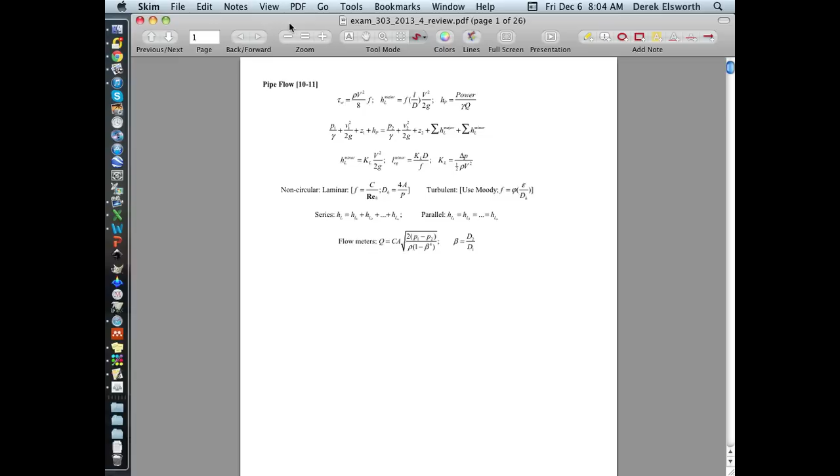That might be the last thing on your minds right now. You realize you have to get across the final hurdle. As I say, it's been a pretty broad waterfront. In the light of a number of years working, you might decide whether this class is useful to you or not. But certainly, it's a fundamental class in terms of the activities that you'll ultimately use in your own disciplines when you graduate from here.

But that might be the last thing on your mind right now. So getting ready just to get the hell out of this class basically might be something that's more in line with your thoughts. So the final is on the first Monday. It's an evening final. It's just 10 minutes short of 2 hours, so it's an hour and 50 minutes. It'll be the same scoring as before, 330 points, full score is 300.

There are 3 questions. Instead of making it comprehensive as we have done in the past, so if you look at the prior exams, you'll see that some of them have pressure on surfaces questions, this one will limit itself to the last 3 topics. So the last 3 topics are pipe flow networks, external flows and forces on structures, and channel flows. So those are the 3 topics that the last one will be.

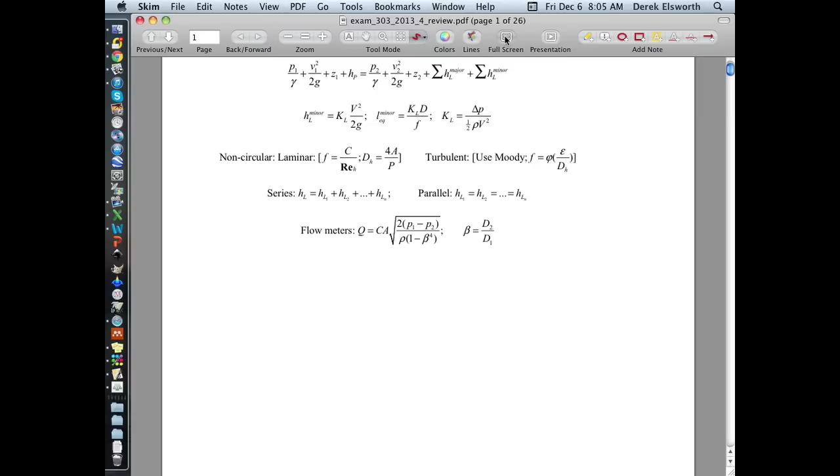But also, we made the point before that the one question that didn't turn up on the 3rd midterm actually will be on this. So out of the 3rd midterm questions, there were potentially questions on pipe flows, energy equation, and streamlines, right? And so you guys would know what didn't turn up on the main midterm, not the retake exam or the conflict exam. Only talking about the midterm. So I've tried to steer you in the right direction before.

So pipe networks, external flows, and open channel flows are fair game on this. Plus the run over from the other one. Of course, you can look at the materials that were talked about in the 3rd review session to get some feel for that. Because basically what happened was I wrote a question on the 3rd midterm, which made the exam too long, so I just pulled it out. And so you can probably guess exactly what that would be from looking at that. So at least you're ahead of the game in that.

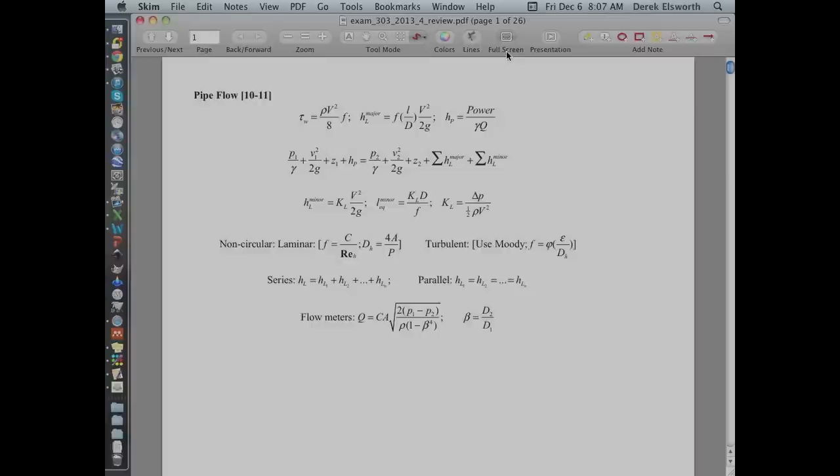I'm doing all the talking. Anyone have questions for me before I start going on? So I'll just review the stuff from the last 3 materials that we have, and certainly if you look at what's happened in the past, the materials that we went through in review basically encompass all the material that you'd need. You need to understand how to use it, and to use it somewhat creatively maybe, but that's basically the deal. Okay. So that's what we'll do. I'm not going to worry about that.

So pipe flows. Well, we know about pipe flows. You'll never have to draw or bring a Moody chart, but you certainly know what they are now. In terms of the big picture, we've seen the same kinds of behavior for pipe flow, which is an internal flow, and external flows. It's the same idea, right? At very high Reynolds numbers, the magnitude of this friction factor, which is a coefficient of drag, is constant, and it changes as a function of velocity at low ones, because this is viscous drag and this is pressure drag in the system, and so you know that. And so we've seen the features of that before.

I put that on only because when you're dealing with pipe flow networks, you need to know a little bit about pipe flows, and this is basically the expression that you know how to use. You used it on the last exam. What are the features of this? Well, the pump head is positive if you're putting energy into the system to pump. It's negative if you're generating electricity. The magnitude of this pump head is what? It's probably written on here. It is the power divided by the mass flow rate, Q rho g, I think, right? So this is the mass flow rate times g. Pretty sure that's right. Head losses are always positive.

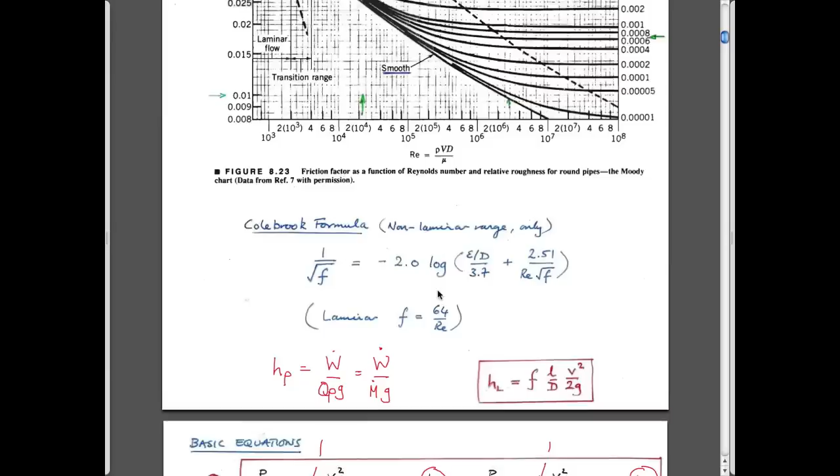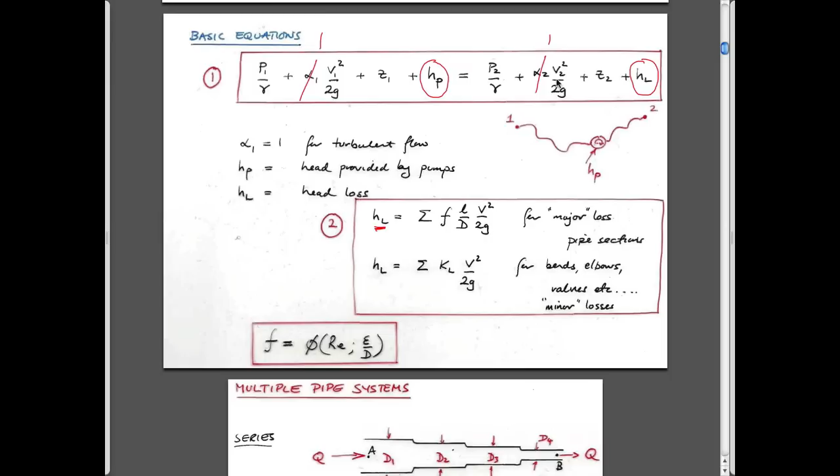Irrespective of which way you're moving, you're always losing. And the pressures, velocities, we always put this 1, we don't care about that. Elevations, so we know everything about these heads. These are at a point, and you write these at a point, and then you have to include the influence of losses in the system. Losses come in 2 flavors, so-called major losses, which are small incrementally, but over a long length of pipe they add up. Sum friction factor, given by this. Constant if it's turbulent, not a function of velocity. Length of pipe, diameter of pipe, velocity in the pipe, and so-called minor losses, which you sum up, which are velocities in the fittings, per se. So these are the local velocities in the pipe or the fittings. These are the velocities at the endpoints, and so you well know how to do that.

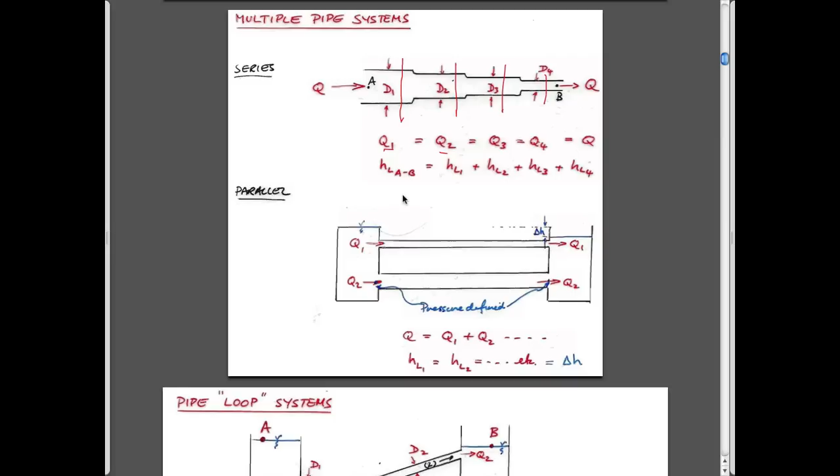If you use those pipe flow equations for systems, systems come in two different flavors: either in series or in parallel, and they have different attributes. If they're in series, that's by continuity. If you take a section anywhere across the pipe, the volumetric flow rates have to be equivalent to each other. If you know the flow rates through the system, you know the velocities, and therefore the head losses, and you can sum those up to move from A to B, because the sum of the head losses has to add up to the total head loss across the system. So those are the attributes of a series system.

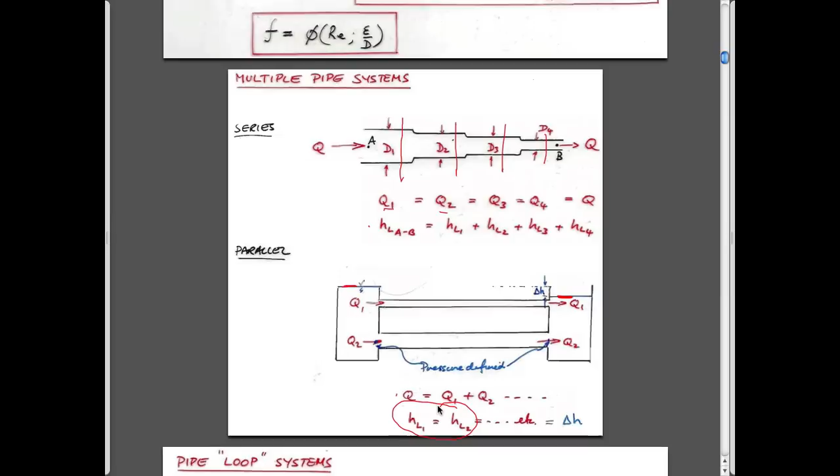If you have it in parallel, the opposite behavior is true: the flow rates have to sum. You have a flow in here, and a flow in here. Because it starts off at this particular head and ends up at this particular head in both cases, the head losses in both pipe systems have to be the same. If you had a third or fourth pipe, that would have to be the same as well. So those are the rules for dealing with pipes.

If we deal with loop systems, the behavior is such that you can write Bernoulli between upstream and downstream and take two different paths. In this particular case, we did one like this in class. What you can do is write Bernoulli between the upstream and downstream. You make it easy for yourself by doing it between cases where you can get rid of the most variables.

So if it's a big tank and you can write it on the surface of the big tank, you know the pressure here is atmospheric. You know the big tank assumption would be this, so you've immediately got rid of two of your terms. And if you're working with the z magnitudes at each of these cases, you know the difference in the elevations. So the solution is to write the expression through one route and then through a second route.

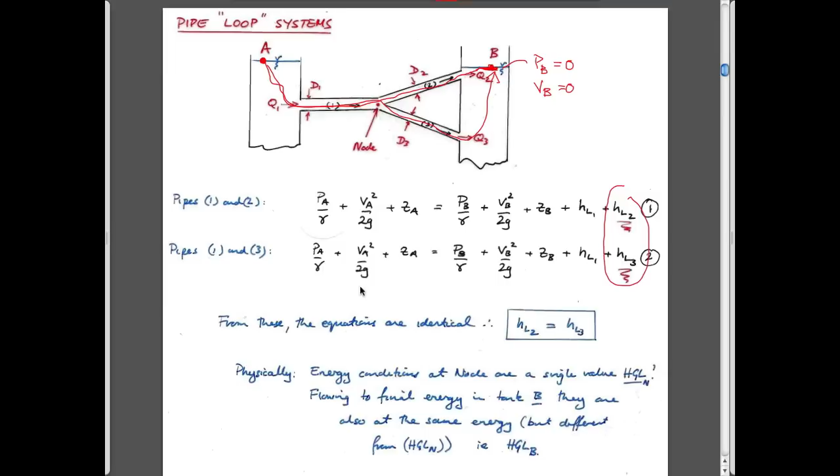And that's what these two expressions are. Since they both end up at the same place, and every other term within here is the same, these magnitudes have to be equal to each other. So those three requirements are the ones you might have to have a handle on—nothing more than that.

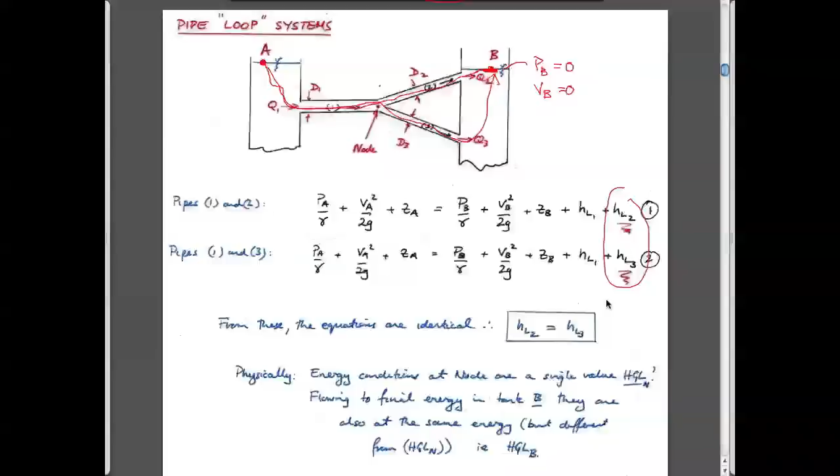We won't do the ones with three different reservoirs where you have to solve a cubic. We said in class that you wouldn't have to do that, and you won't. We went through this one in class—I won't go through it again. You can probably decide from that what to focus on, maybe based on what we talked about for a long time in class.

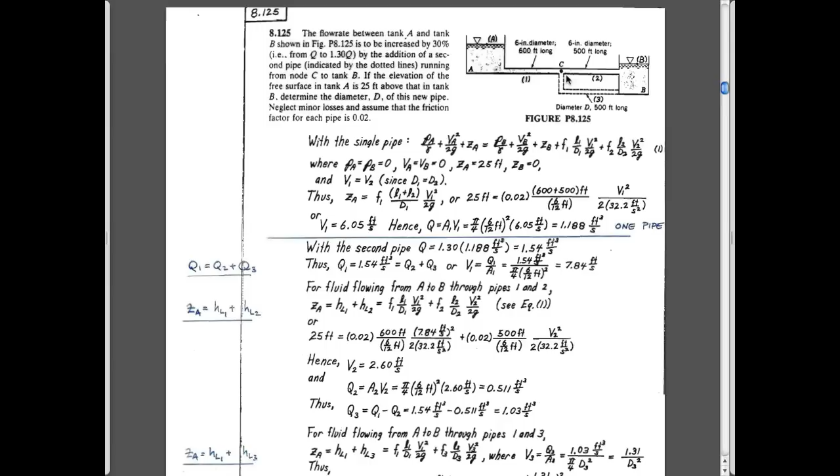This is a question saying if you want to increase the flow rate by 30%, how big a pipe do you have to add into the system? We went through that, but I'm not going to go through it again. You can decide based on that what you want to focus on. You'll realize there are subtle messages in here, not least of which was that we also looked at a video coming in here—so that might have something to do with what we're doing as well.

External flows: you can integrate external flows around buildings and around features. I won't ask you to do that in the exam. I'm not sure if there were any homework questions that did that—maybe there was one, I'm not sure—but we won't ask you to do that. We will ask you to know how to use these formulae for lift and drag.

Lift and drag, in a nutshell: lift is the force that's perpendicular to the flow, and drag is the force that's parallel to the flow, just by definition. These are lift forces and drag forces as a function of a non-dimensional parameter.

This is basically lift over area—if we take these terms here, over a half rho u squared. This is an Euler number, right? This is a lift pressure—lift divided by an area is a lift pressure.

So this is basically an Euler number, which is an important number for us to understand. The lift coefficient is really just a non-dimensional parameter, you could think of it as kind of an Euler number. And this force is relative to an area.

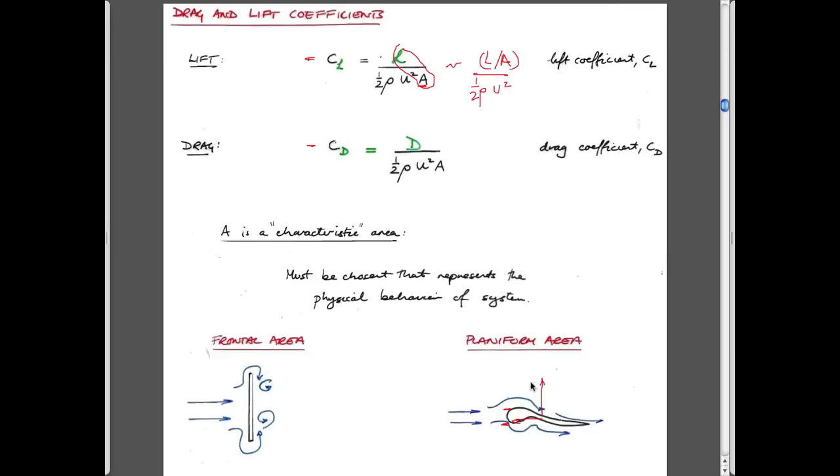It depends on what you're looking at as to what that area might be. For instance, if you're looking at drag on this wing, the area might be the frontal area for drag, but the planiform area for lift. You'd always be told that if that's the case, so you need to be mindful of that.

Also related to this behavior is this division of behaviors into three regions: you have laminar, you have transition, and you have turbulent. Those exist for external flows as well, right? It's exactly the same behavior. It doesn't matter if you're flowing on the outside of a pipe or the inside of a pipe.

The idea is that if you're looking at very high flow velocities, then typically the friction factor is constant. This is equivalent to the coefficient of drag, basically. And also when we look at free channel flows, this is also kind of like the Manning coefficient. So there's some theme in these behaviors, whether you're looking at flow in a pipe with friction forces on the side, flow around an object with friction forces or pressure forces on the side, or a channel where you also have friction forces and loss of velocity as the mechanisms.

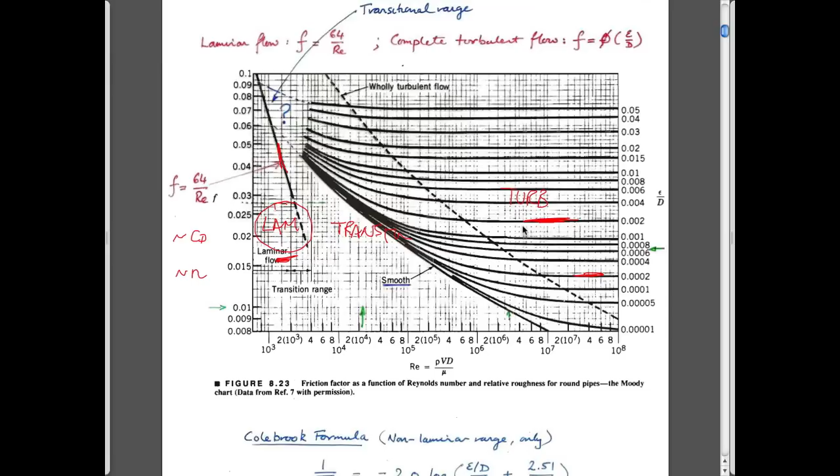The point I was going to make is that when you're looking at drag in the laminar region, this is due to viscosity. It's viscous drag due to the fact that the molecules of air, or typically the molecules of water, want to adhere to the structure they're going around, and they have a physical drag that pulls it across. If you're looking at these higher regimes, this is because you're killing velocity, and the drag force you have is because the velocity away from your plate is high, while at the front face of your plate it stagnates, so there's no velocity at all.

So as you go from left to right in that plot, you're looking at the different behaviors you'd expect to see. Almost all the drag force here would be due to velocity drag, because you're destroying the velocity. If you look at a plate aligned slightly differently, where flow occurs like this, you could imagine that as the velocity changes as you go away from this, you get some drag force applied here. So you get different effects at different magnitudes.

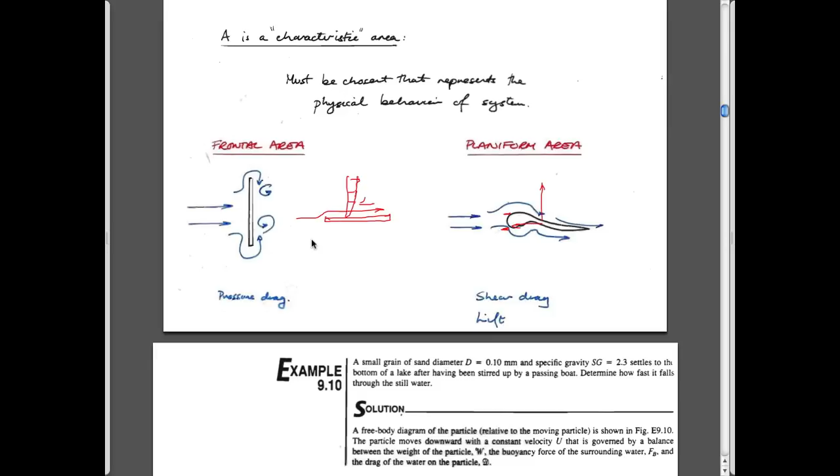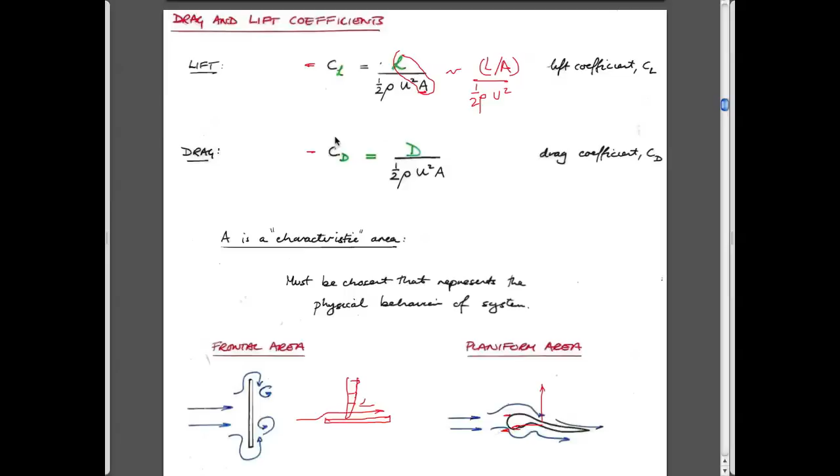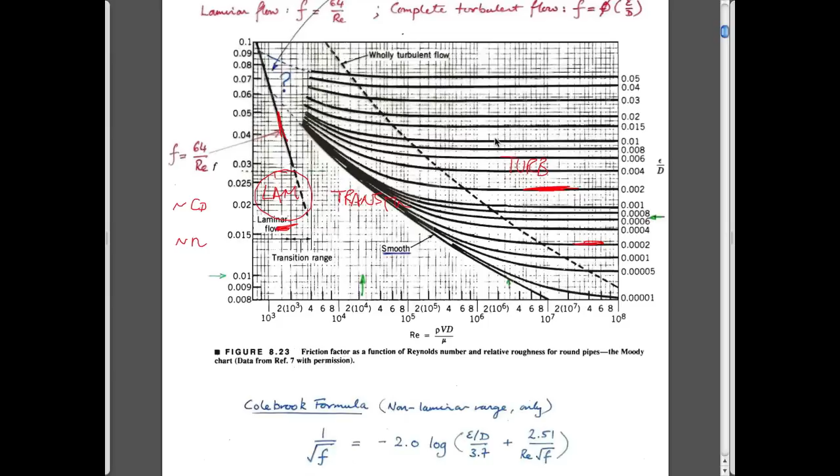Typically, both of those behaviors are encompassed in this drag coefficient. But if the drag coefficient is just a single value, it typically means the assumption is, which is often correct, that the flow velocity, or the Reynolds number, is so high that you're on the right-hand side of the chart. So as you increase the Reynolds number, the magnitude of this drag coefficient doesn't change, which means that most of the drag or the lift is due to changes in pressure.

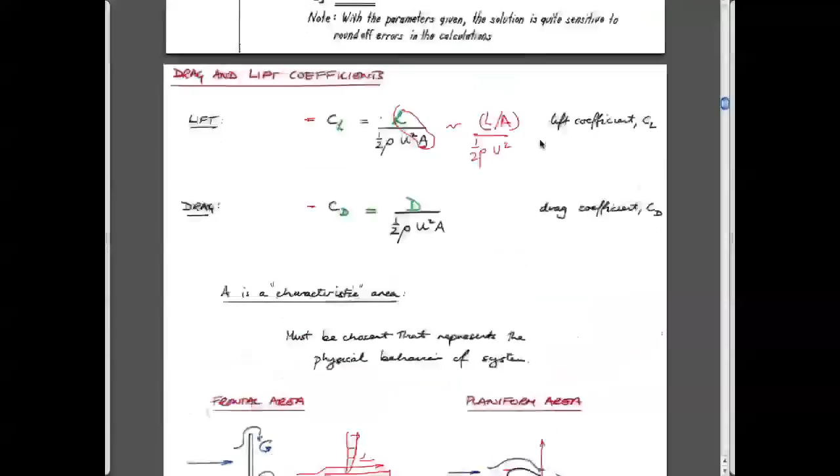So typically that's the case for gases. You need to know lift and drag coefficients. They're basically Euler numbers, and the area we're talking about depends on a frontal area or a planiform area, but you would know that. Obviously the density is the density of the fluid flowing around it, not the density of the object, as you know, stating the obvious. And we went through two examples.

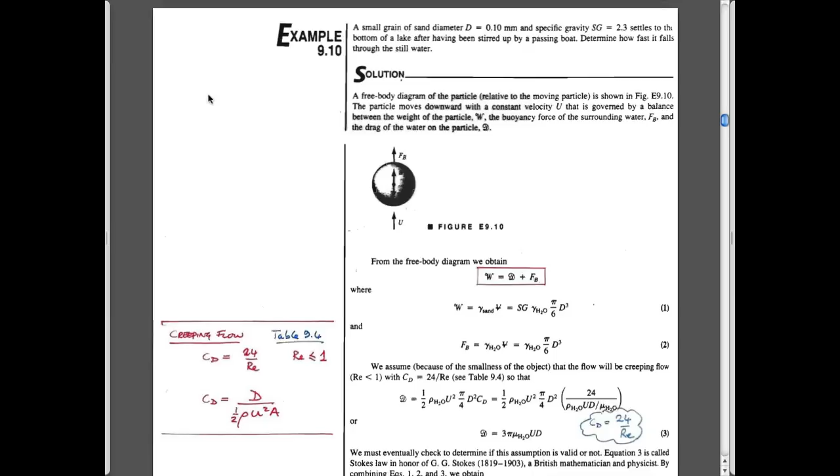The two examples actually deal with the two flavors of these behaviors. If you look at the Moody chart, I know it isn't appropriate for drag directly, well it is for internal drag inside pipes, we have these behaviors: laminar and turbulent. And the solutions you use to solve for these are different, and these two solutions here embody both of these cases.

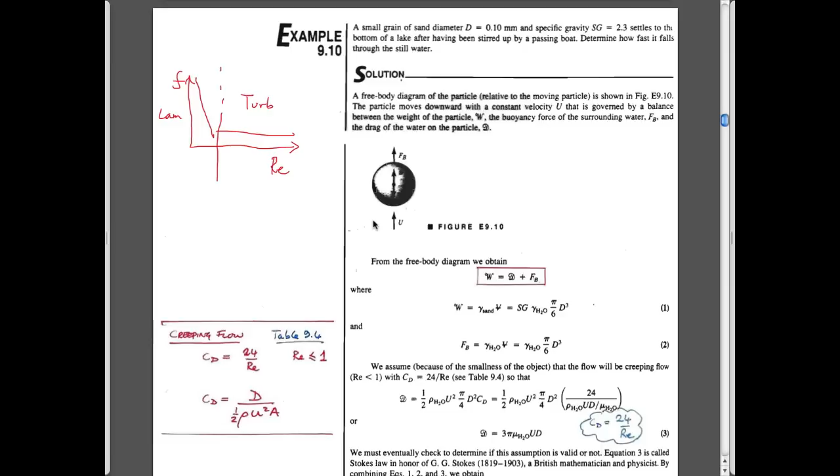This one is a solution for a ball falling through liquid. Sounds like an esoteric problem, but it's one of the ways in which you get grain size distributions of very fine minerals by dropping them into water and measuring the settling velocity, and from that settling velocity calculating the size fraction of the particles.

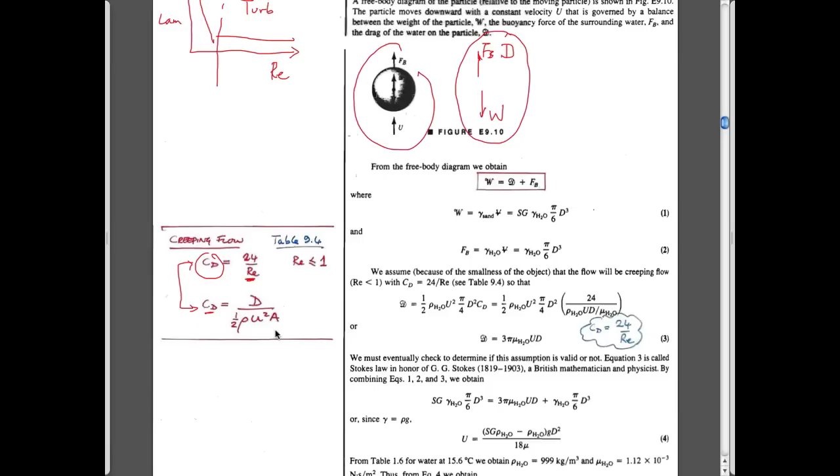In this particular case, the two important expressions are to do a free body diagram, weight of the particle, buoyant force, and drag force, and reconcile those with two parameters. One is the fact that the coefficient of drag is a function of the velocity, which you'd like to solve for, and also the drag force is related to coefficient of drag through this. So you can relate these two, and solve ultimately for the velocity, and you can look through how to do that. So that's for one region of these behaviors, in this zone here for laminar flow.

The reason the solution works out that way is because the drag coefficient is a function of the Reynolds number, which is a function of velocity. This makes it more complicated because velocity occurs in both terms, and you have to work it out. If you look at the case where you have turbulent drag or pressure drag occurring, this is viscous, and this is pressure.

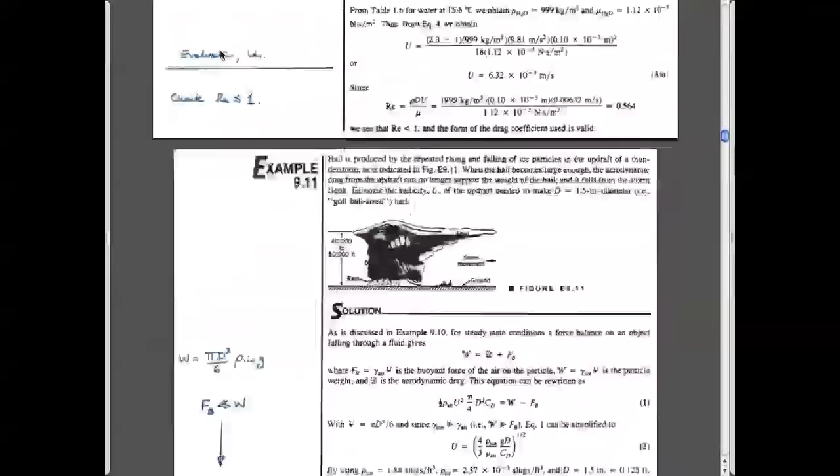The epitome of that is the hailstone example, and it's exactly the same kind of solution. You have a hailstone being lofted up inside a cloud. There's a buoyant force acting, there's a drag force acting, and there's a weight of the hailstone. The drag force is a function of the velocity through this coefficient.

We only use a half just out of convention because it's in Bernoulli. This is v squared a. Now this is a bit more simple to solve, one, because the buoyant force is inconsequential since it's ice displacing air, so the density of air is inconsequential and you can get rid of this. You can relate the drag force to this, and you can solve somewhat more simply than the other case.

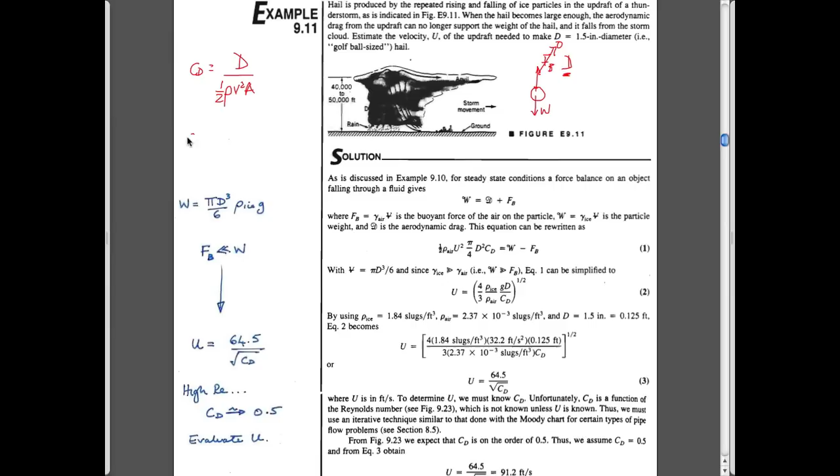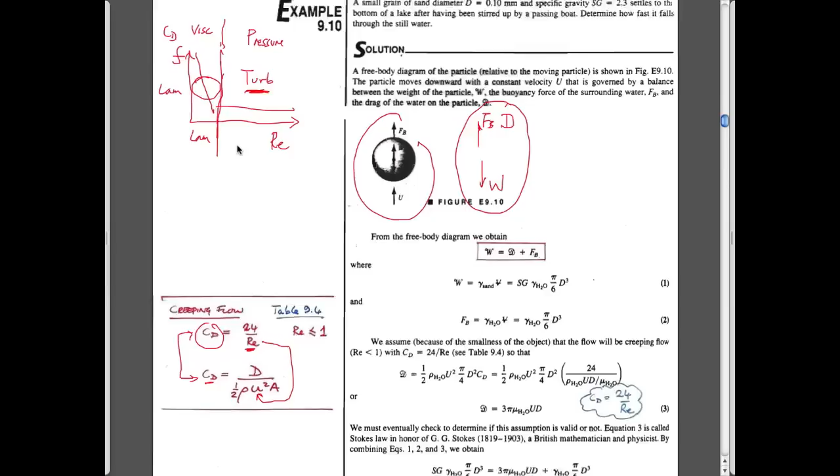Because you don't have the drag coefficient being a function of velocity, the coefficient of drag is constant. Understanding how all this fits together for these two examples is probably worthwhile figuring out for obvious reasons. So that's an important component of what we've done.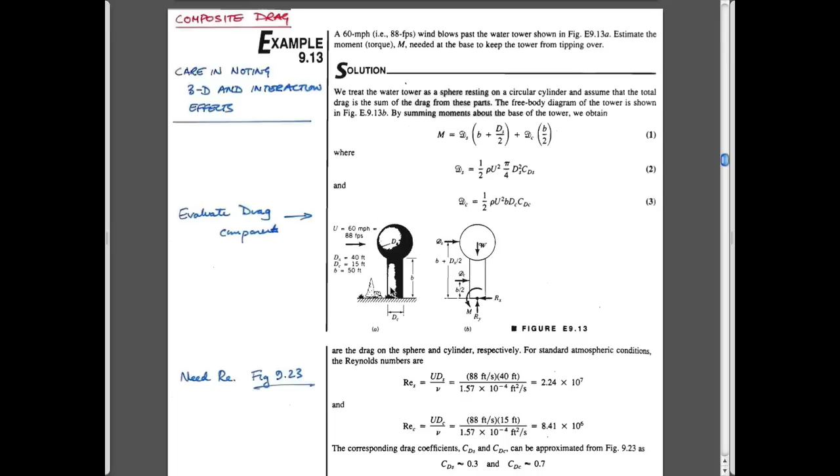We talked about composite drag. It's really just the same as any of the other cases, you're adding up the individual contributions due to multiple bodies. If you have a whole bunch of bodies, they have a certain drag associated with them. The basic assumption is that if you have a sphere on top of a cylinder to represent a water tower, the flow field from the sphere doesn't influence the flow field around the cylinder. Of course it does, but within engineering calculations it probably doesn't affect it that much. That's the assumption used, just to be able to sum up the individual components. We didn't spend much time on that.

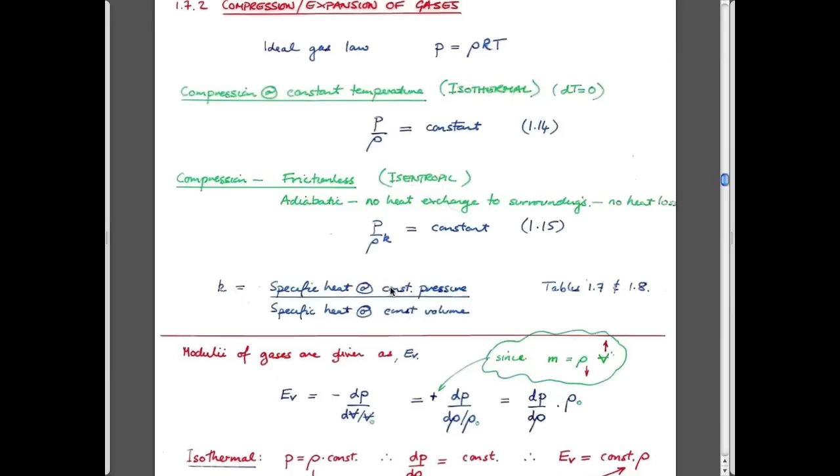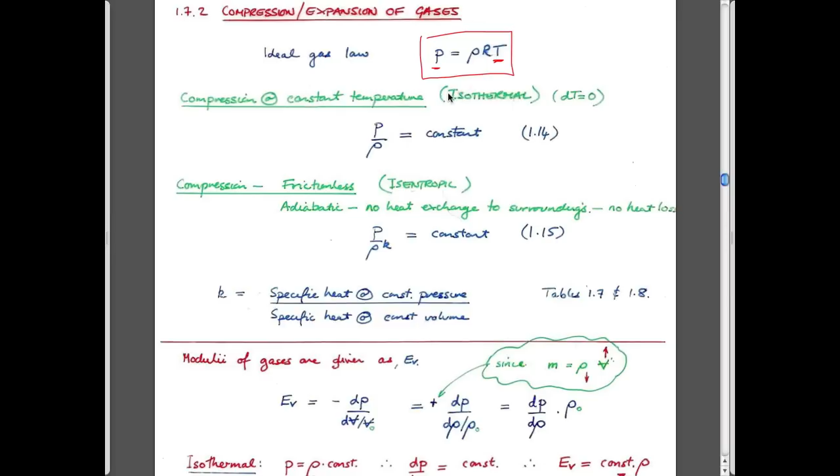This comes from very early on, so don't forget the ideal gas law. Don't forget that this is absolute temperature, and that this is absolute pressure, and that the density comes from this. Remember the ideal gas law.

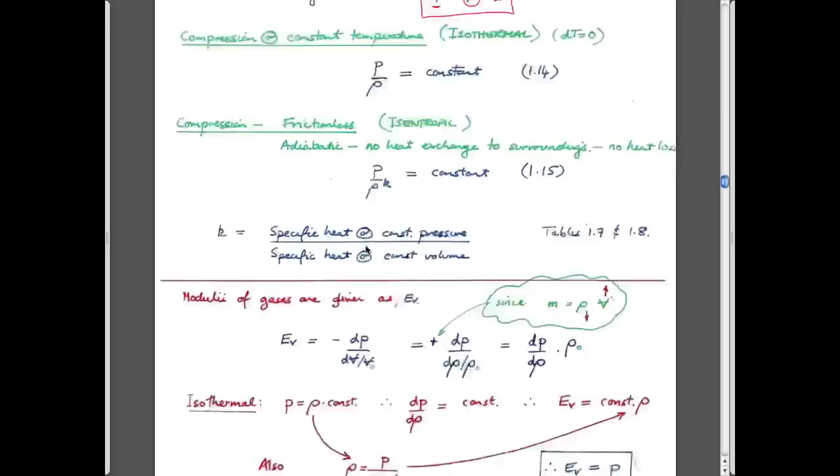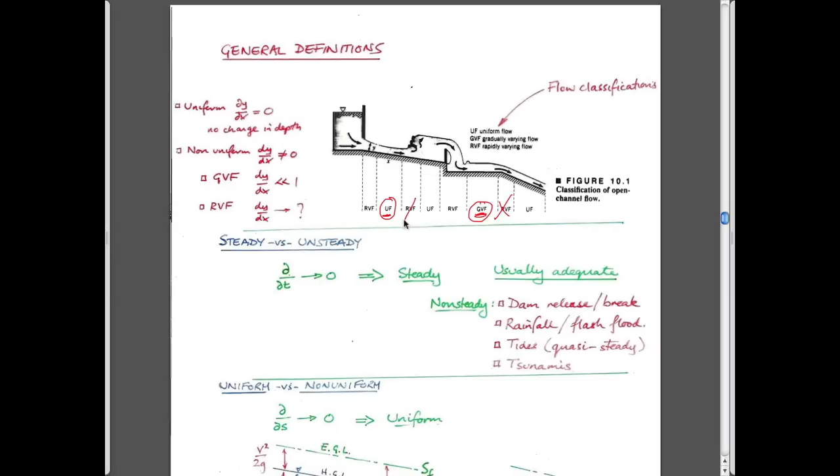So pipe flow networks, external flows, open channel flows - we dealt with two behaviors and classified them in different ways. We talked about the kinds of flows we could get falling into three categories. We wrote the most strange category off as being off the sheet for examination, but the two flows we did talk about were uniform flows and gradually varying flows. Rapidly varying flows we talked about too - hydraulic jumps we talked about on Wednesday, but those are off the chart.

The two that we can concentrate on are uniform flows and gradually varying flows. The features are that uniform flows basically mean you have a bed with a slope, and the depth of water upstream and downstream is the same. Therefore, from continuity, the velocities upstream and downstream have to be the same, so the velocity heads have to be the same in each case. The energy grade line, the hydraulic grade line, which is the top surface of the water, and the slope of the bed are all equal to each other - that's the characteristic of a uniform flow.

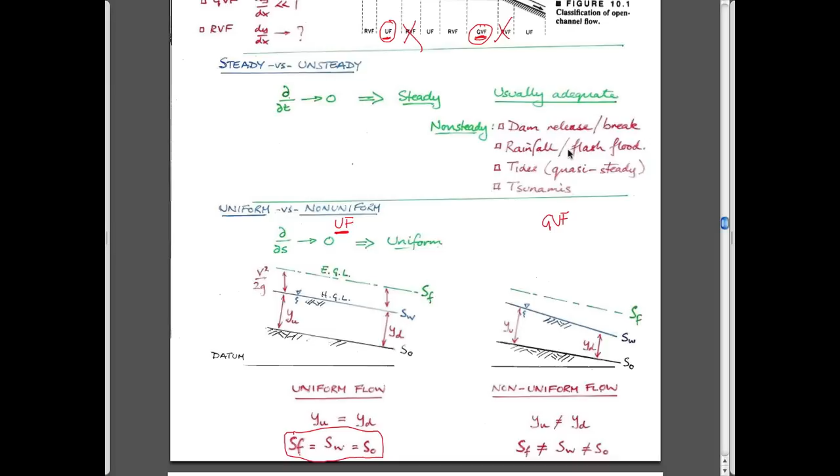If you have a uniform flow, you can use very simple methods to calculate the flow volume, although we need some way of figuring out when it's a uniform flow. When you make a channel and plan to fill it with water, you don't know that the hydraulic grade line and energy grade line are going to be parallel to each other, so we need to know how to calculate that. Those are the two important features. In terms of uniform flows, you don't have to derive any equations, but you need to probably know these two equations at the bottom.

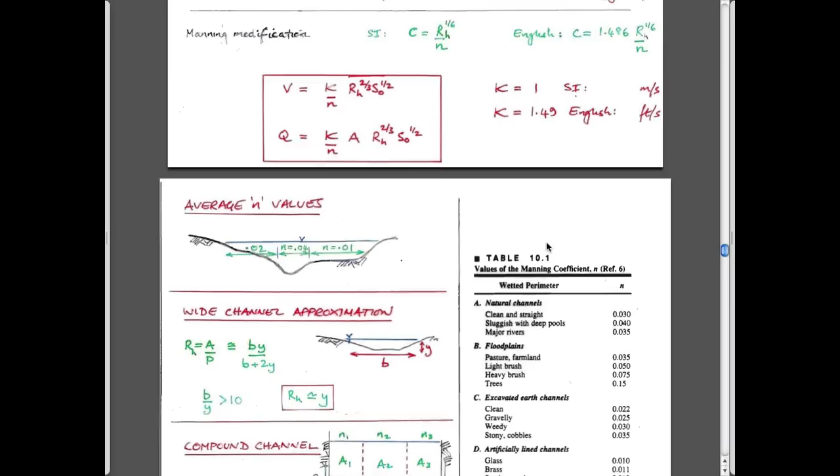Straightforward to use, and they give you an average flow velocity as a function of a coefficient. This coefficient for SI is equal to 1, and it has units. It's one of the few equations we've used that actually isn't dimensionally homogeneous, so it matters what units you use.

This is hydraulic radius, which is equal to cross-sectional area over wetted perimeter. And this is the slope of the bed, equal to the elevation Z1 minus Z2 over the length over which it occurs.

So if you know the slope of the bed, hydraulic radius, and the Manning coefficient - friction factor and coefficient of drag and Manning coefficient really are the same kind of thing. They give you some way of looking at the amount of losses in your system, typically due to friction or pressure drops. In this case, it's really due to destruction of velocity, due to the combined effect of both.

And so you can get the average velocity in a stream from this. If you multiply the average velocity by an area, then this is different only by that. The other exponents haven't changed, but you need to use the right units - convert everything into meters per second. Didn't spend much time on it, but you could average Manning coefficient values, or you could divide it up into a compound channel.

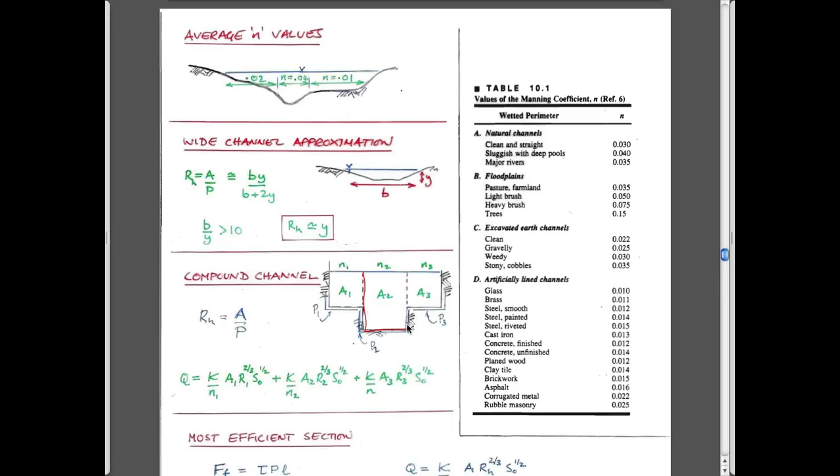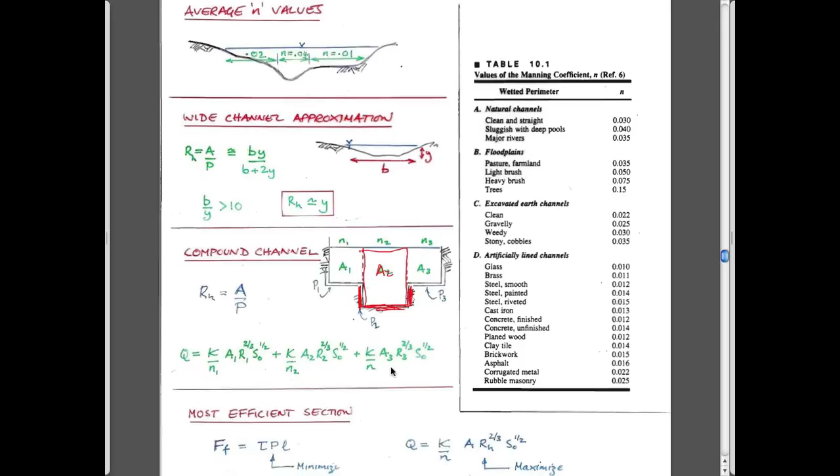If you divide it up into a compound channel, of course the area over the perimeter for this would be the area, right, this box, but the wetted perimeter would only be this. So you need to be thoughtful of that. I guess that's probably common sense, but sometimes it serves to point these things out.

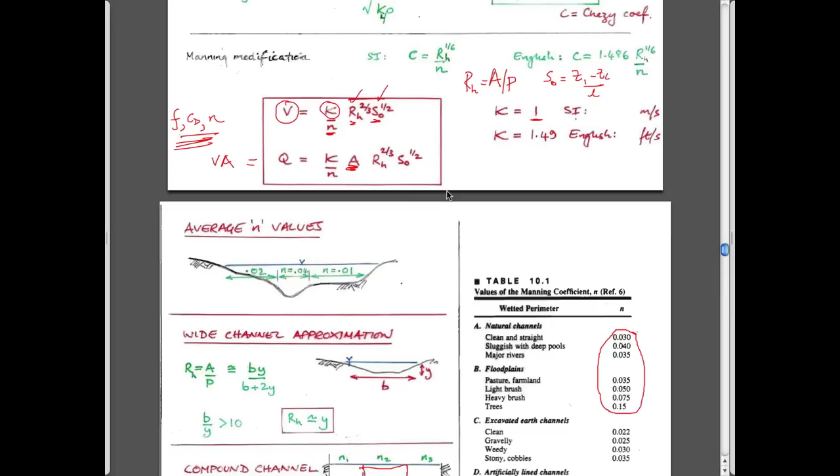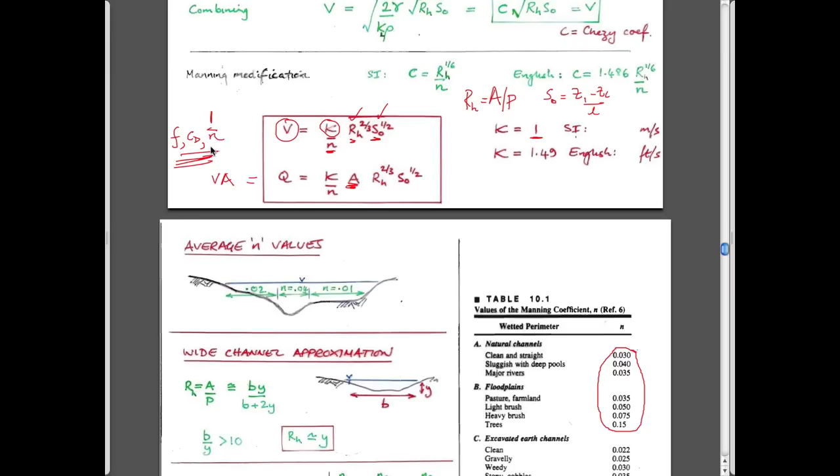And I suppose from the way it's written, maybe this is really 1 over n, in terms of these, because this is 1 over. So as the Manning coefficient gets smaller, there's more losses in the system. As the coefficient of drag gets bigger, there's more losses. As the friction factor gets larger, more losses in the system. So these are all equivalent to each other in some way.

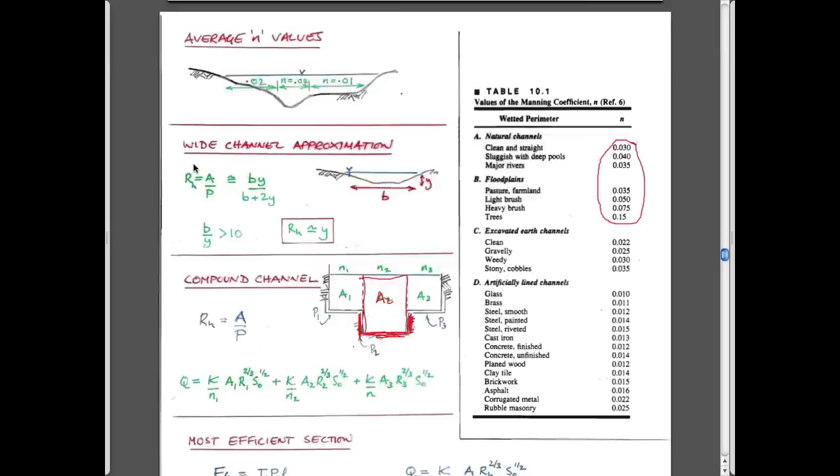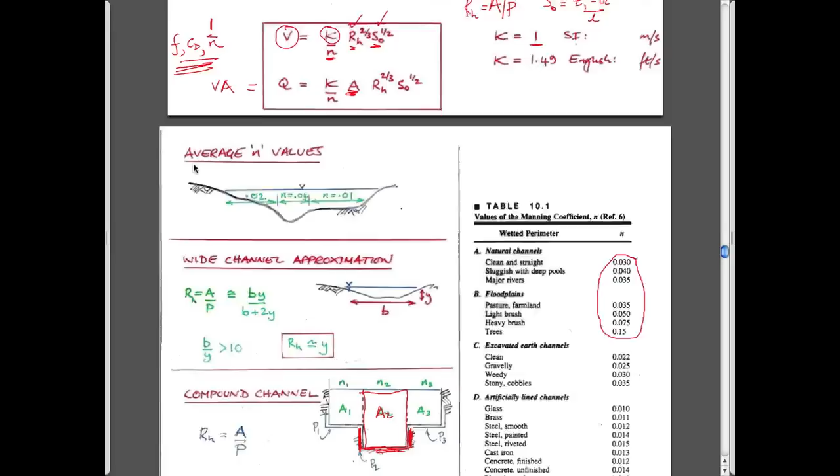So friction factor, coefficient of drag, and Manning coefficient - all dimensionless parameters which just define the losses in the system. So this is just plug and chug, and if you get the right magnitudes, you'll get the right result. The key word, I think, is uniform flow - if you see uniform flow, that keys you in on this.

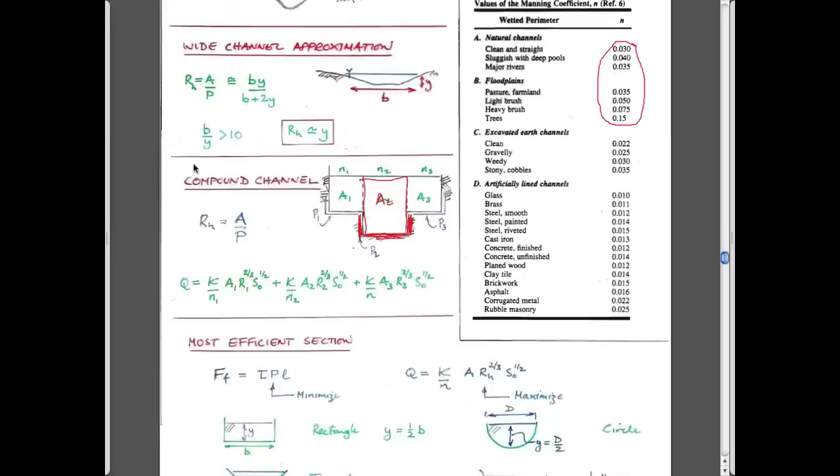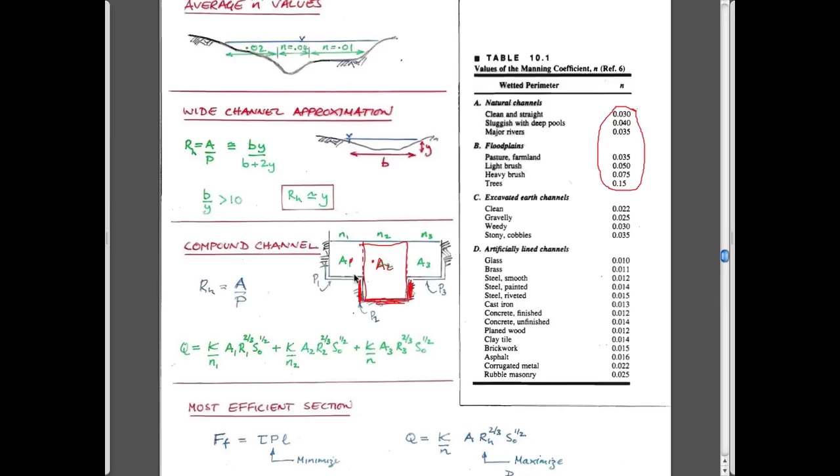An example - you've certainly done these in your homework assignments to take account of these. Remember that this isn't part of the wetted perimeter because the fluid that's going down in A1 out of the board or into the board is going into A2 into the board. They're going at the same velocity, roughly, so there's no real shear between them, and that's the reason for excluding that component.

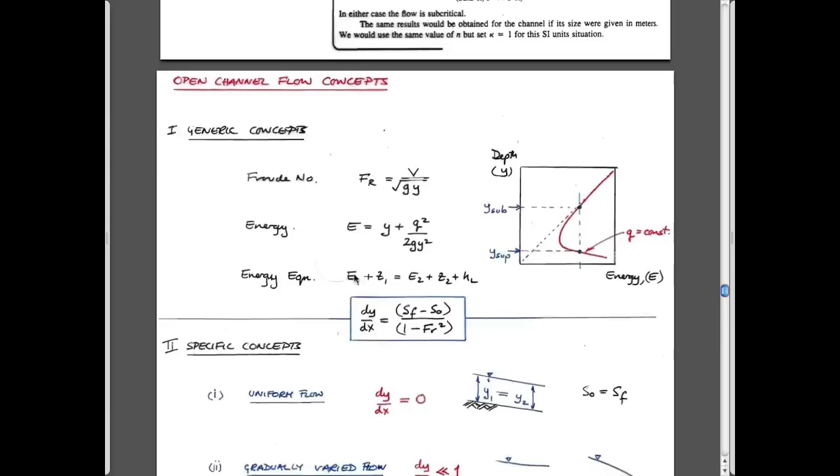All right, so that's uniform flows. The other component we talked about is gradually varying flows. The concept we went through - let's not worry too much about this, but these are the three very important features. The idea was that we could basically write the energy equation in this form, and all we did was take the magnitude of...

This is Bernoulli if you like - all we did, just to put this in context, was take the magnitudes of the velocities going across this upstream and downstream part, and we took the pressure at the bottom, which is just equal to the height of water above us. We took the velocity going across this section, which you assumed is constant across this section.

And we combined it in a term which we called specific energy. In other words, specific energy just includes the pressure over unit weight term and the v squared over 2g term - that's all it is. And we choose to write it in a particular way that instead of having velocity in it, it importantly has the magnitude of flow rate per unit width of channel. So this q is equal to the total flow rate divided by the width of the channel.

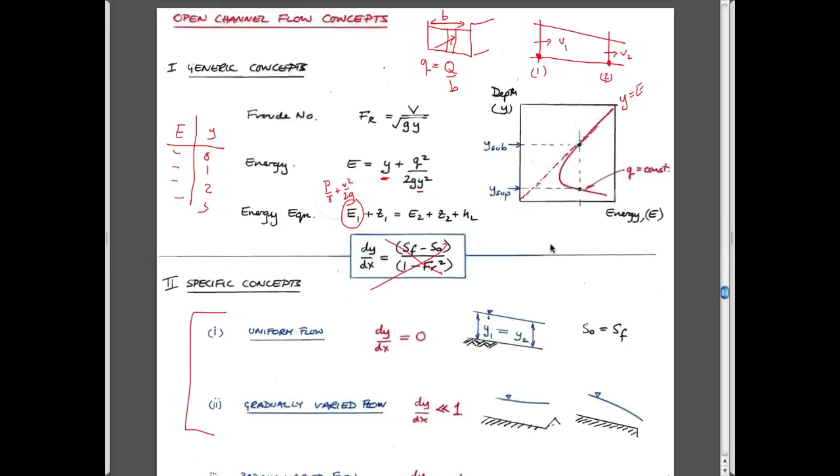And if you would do that, the important things about this equation in terms of physical behavior are that it defines... It defines that if you know, for instance, what the energy was in your flow between upstream and downstream, where

you think that the energy should equal each other, which is always the case for gradually varying flows. It's not true for hydraulic jumps, which are rapidly varying flows, but we said those are off the map for what we're talking about here.

Then you know that upstream and downstream must lie on this same line. And so if you know what the value is at one location, you can figure out that if you're able to get to this point by maybe going through this nose, to get here. We talked about this in terms of ramps, etc.

So that's the importance of this diagram, is it allows you to figure out whether you're flowing slow and deep, if you're subcritical, or if you're flowing fast and shallow. But both are perhaps equally feasible for a given flow regime.

And so the other things that you need to know about this diagram, none of the derivations, but you need to know that this is E critical, and at this magnitude the Froude number is equal to 1.

And you also need to know that this magnitude of Y critical... so is that right? E critical is equal to 3 over 2 Y critical. Maybe you need that. I don't think you actually do need to know that, but you should need to know what that ordinate is. And so you just need to understand the reason for that figure.

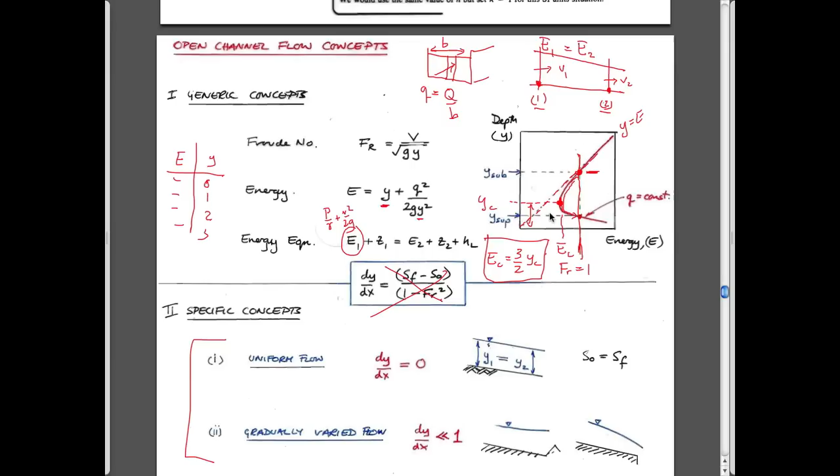And also maybe how to use it in the same way that we've used it in class. And so you may have noticed that some of the exams that we've had have focused on things that we've done in class. So you might want to look at the examples we've done in class.

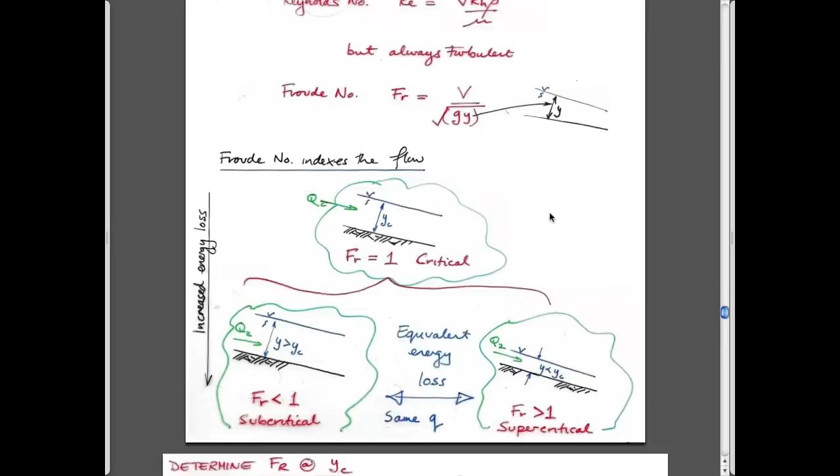This is a pictorial version of what that means. So this, if you drew this out, these relate to this flow diagram that we've just drawn. Specific energy versus depth. The 45-degree line, and this. And so this point here is this.

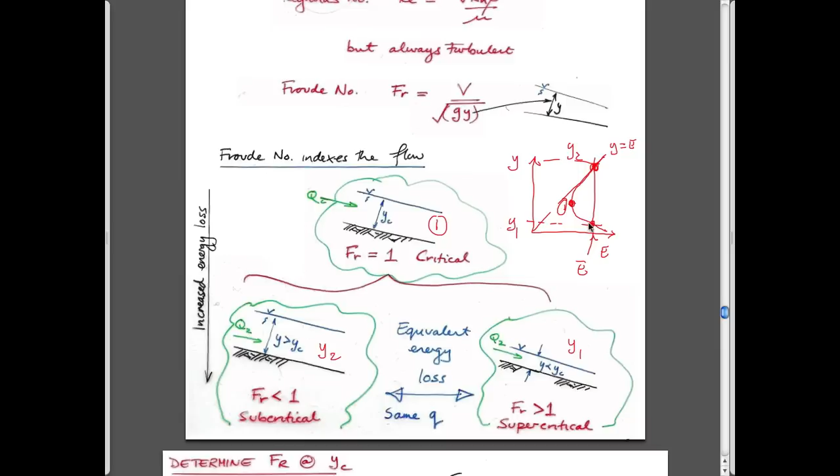And these two other points here, this would be Y2, and this would be Y1. And so the idea is that if you know what the energy is of this system, then you know what the two potential depths of flow are that could develop from this. Okay.

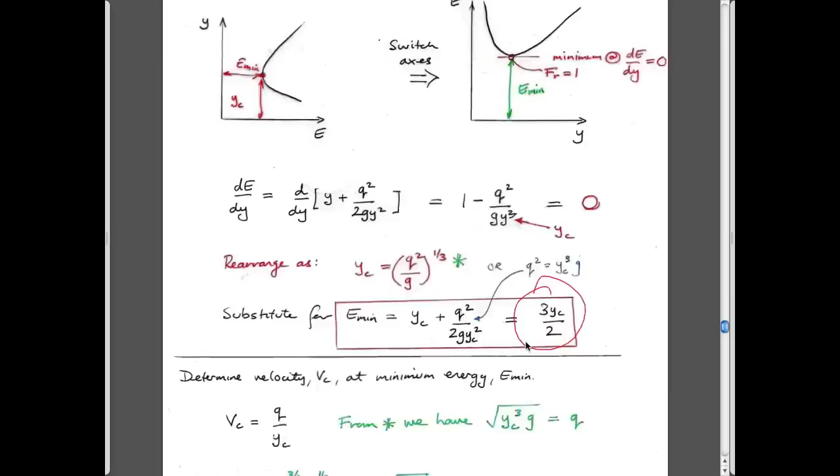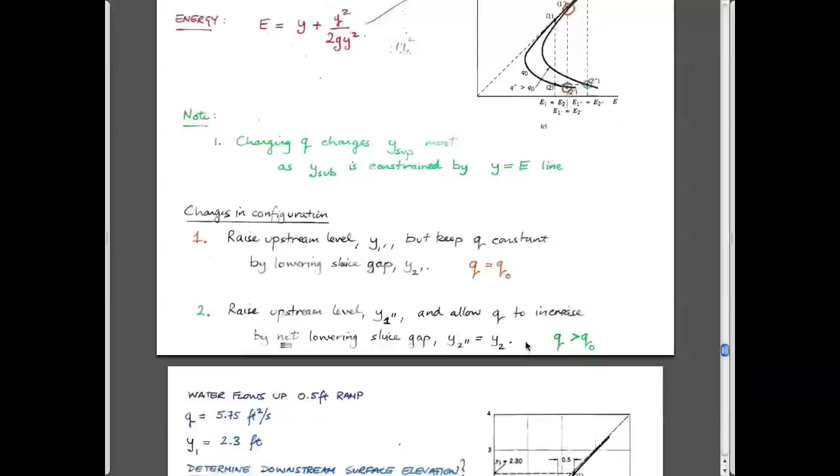I only say this because it gives this equation here. Actually, I don't think you need to use this equation, as it turns out. No. So, but anyway, so you know what those coordinates are. And you'll remember that we spent some time going through this in class and talking about the rationale for it. I'm looking, yeah. I'm trying to think.

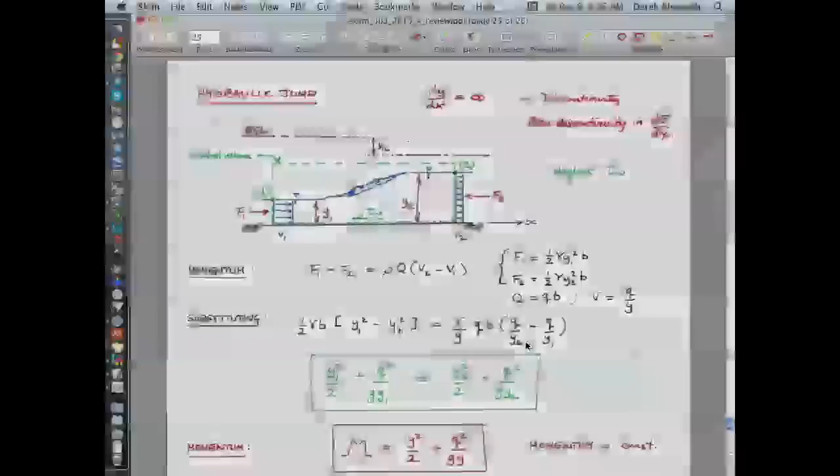Yeah, okay. I thought I'd got rid of these, so let me do that now. Well, I won't change it. So I don't think you need to look at all those ones. Actually, I'll change it in the one online to not worry about those. But you should look at and understand this, I think.

So if you're looking for hints and tips, then for open channel flow, perhaps you can guess there might be something. Look at the Manning formula, Chezy formula for uniform flows, but also understand this in its conceptual form. And the idea here is that if you know what the flow rate is, if you know what Q is, and you put a barrier across your stream, and you know what the upstream flow rate is, then in this particular case, if you would draw this diagram, what do we have?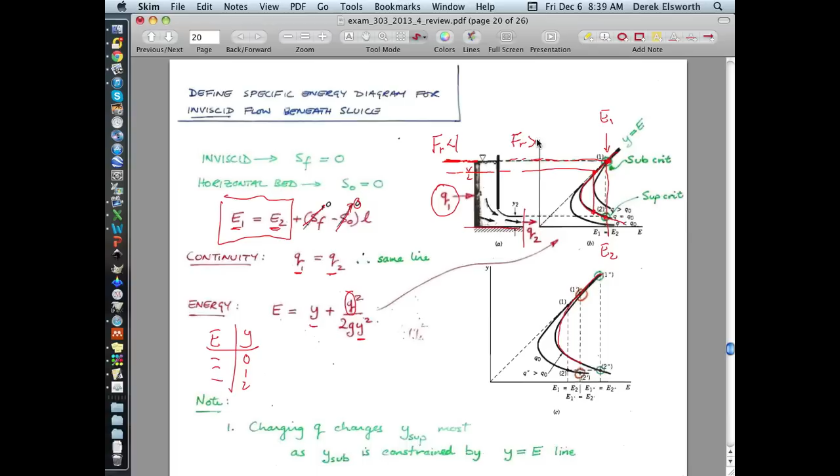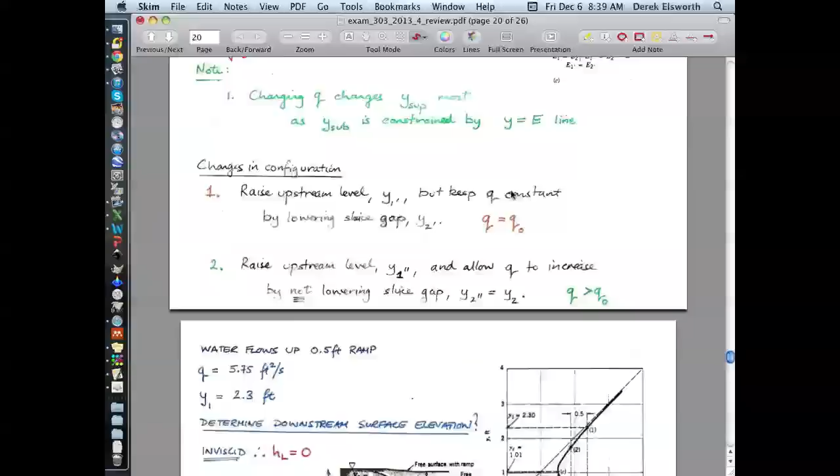And of course, upstream, if you looked at the velocity of flow, you'd find that this was subcritical, and you'd find that this was supercritical downstream of this location. So just understand what these curves are. There is one question on a previous exam that talks about this. Yeah, look at this one page. That's okay. But beyond this, I thought I'd rip these things out. So I don't think you need this. This onwards, I think you don't need. And so I will perhaps remove those.

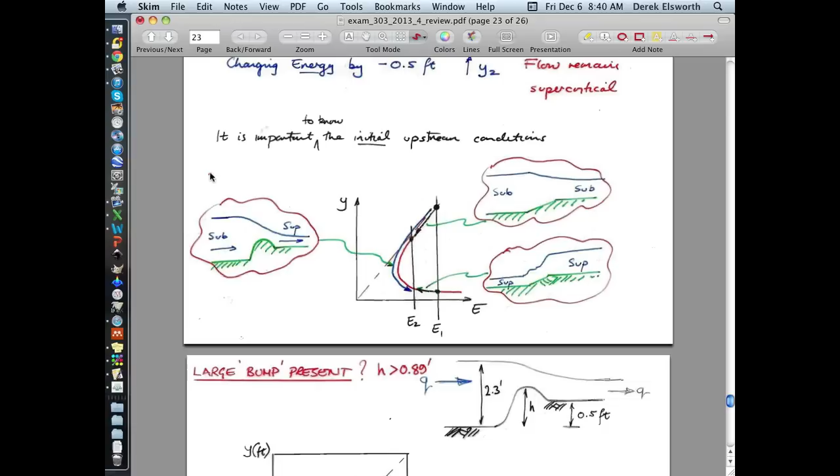Well, yeah, perhaps this says something about what's going on as well. This is pictorially what's going on in these systems, right? So that's perhaps useful. So I don't think you need to know all these calculations from here on in. But if you understand what's going on, that if you have an upstream behavior and you have a ramp, then you physically move down. You can only get to these lower regions by physically going through this nose, by having a bump big enough to do that. And we did an example like that.

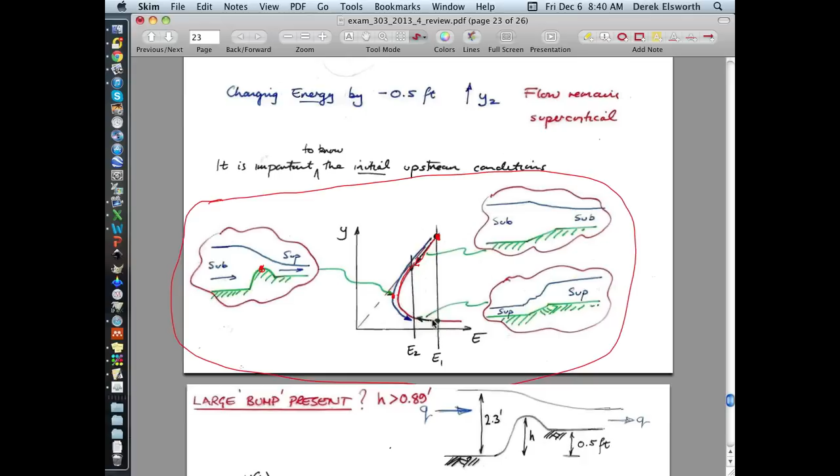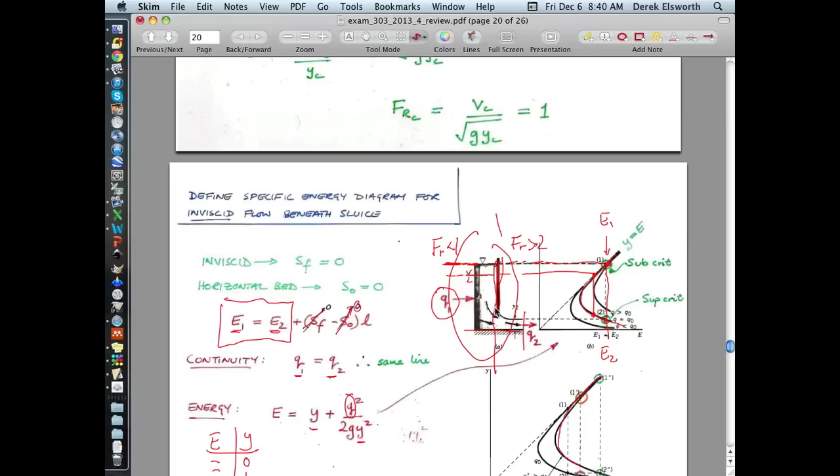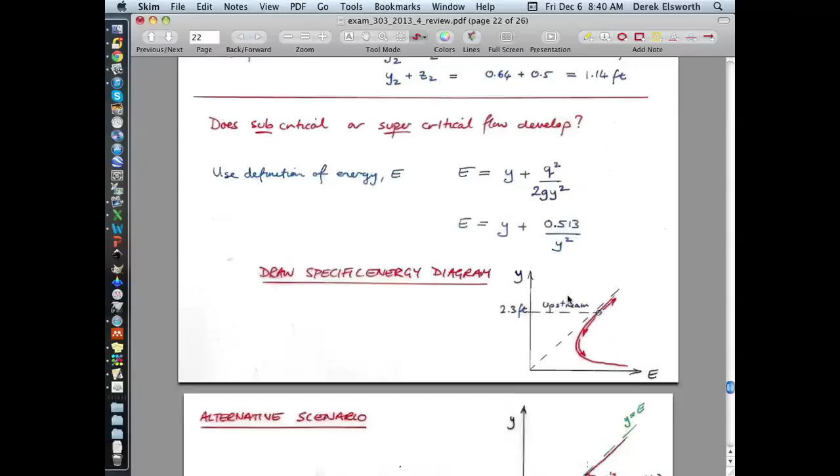So if you don't have a bump big enough to get through this nose and then to be supercritical on the downstream side of it, you physically can't get to this point unless you do something like this, which forces it, right? You're putting a sluice in the way, and by putting this thing here, you're forcing it to go from subcritical upstream to supercritical downstream. So maybe understand these pictures of what's going on, but don't necessarily worry about the math so much. Understand concepts. And so maybe I'll leave those in just as background. You certainly do not need to know this. Although you might be interested to know it in your future.

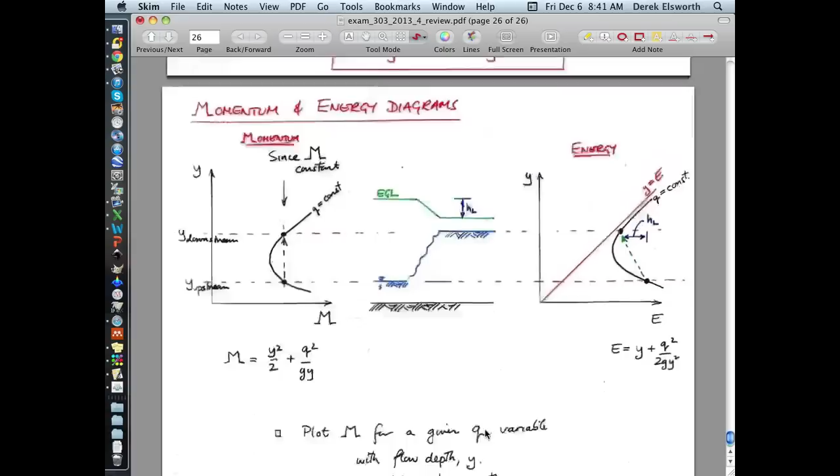So yeah, that's it. So how many pages? 26 pages, of which you don't need maybe the last two, so 24. So that's it. I know I've talked a lot. Obviously we can't do it the same justice as we've done in class. You have the stuff online to be able to look at. Again, the deal is 3 topics: pipe networks, external flows, and channel flows. They are quite similar. They have friction factors, drag coefficients, and Manning coefficients, so they actually are tied together in a relatively logical way, but they're different in their own way.

Look at past exams to get ready. Remember that the past exams were maybe comprehensive, so there isn't comprehensive stuff on here, but you should know how to use the ideal gas law. That's second nature, I'm sure, for you now.